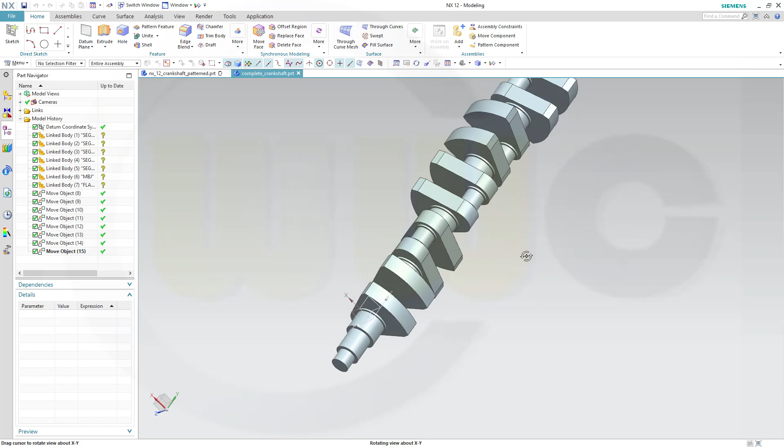I did this crankshaft in almost all programs and in different ways. Today I want to show you the potential of the pattern feature in NX 10, 11 or 12, which allows it to do this very quick. So let's have fun with NX 12.

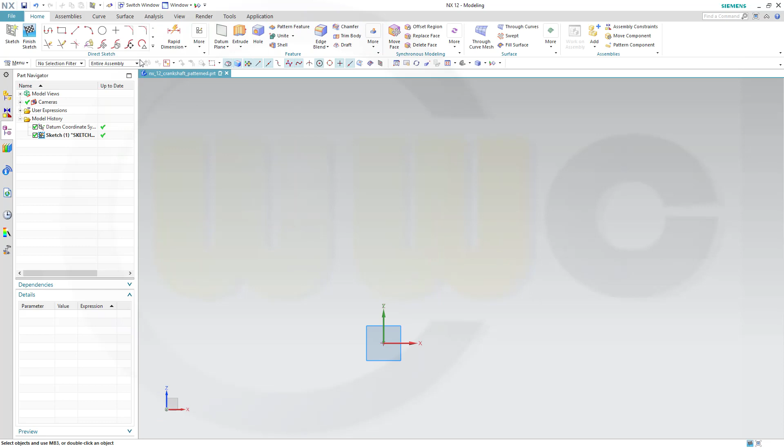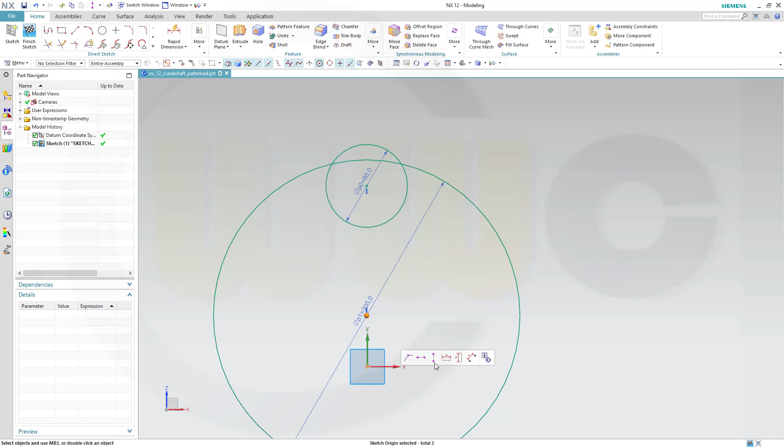Okay, let's start with a sketch on that plane. Confirm. I need two circles. One has a diameter of 80. One has a diameter of 300. They should be aligned. So I think this didn't quite align, so now they're aligned, and this point should be aligned with the sketch origin as well. Okay, the distance from this one to that one should be

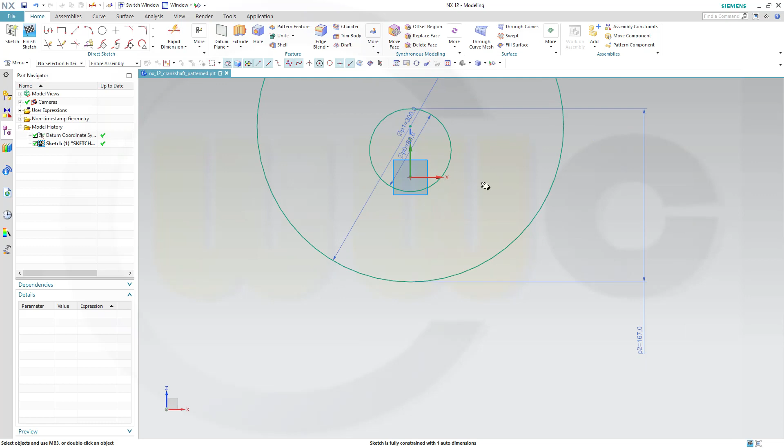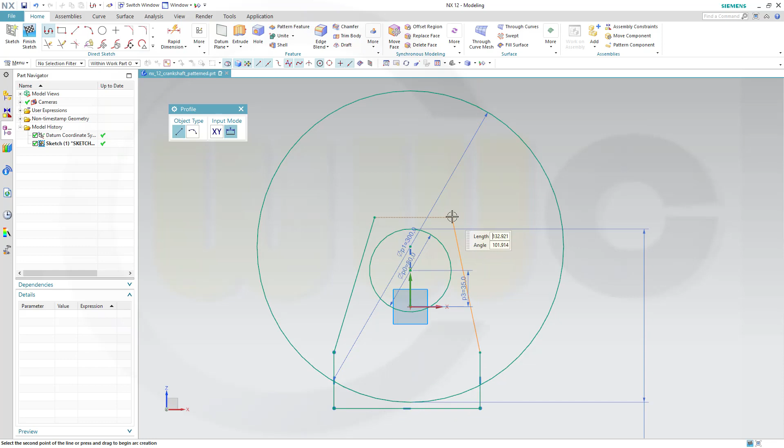167. Okay, and that distance from this point, no, not from this point, but from that point to the sketch origin should be 35. And then I need the profile tool. This should look maybe like this. Okay, this should be tangent, this should be tangent as well.

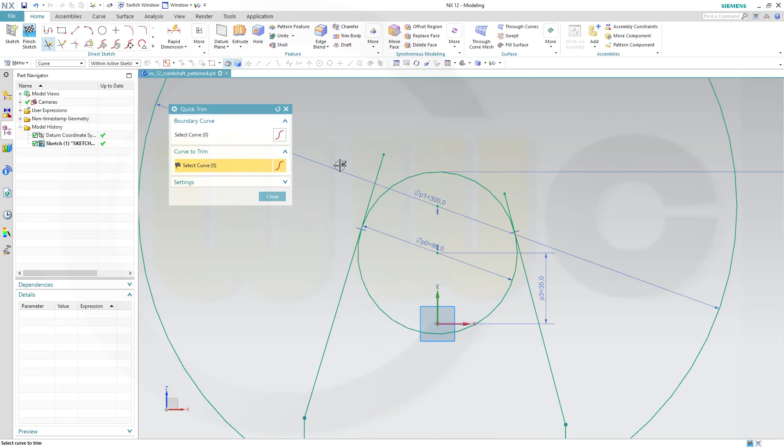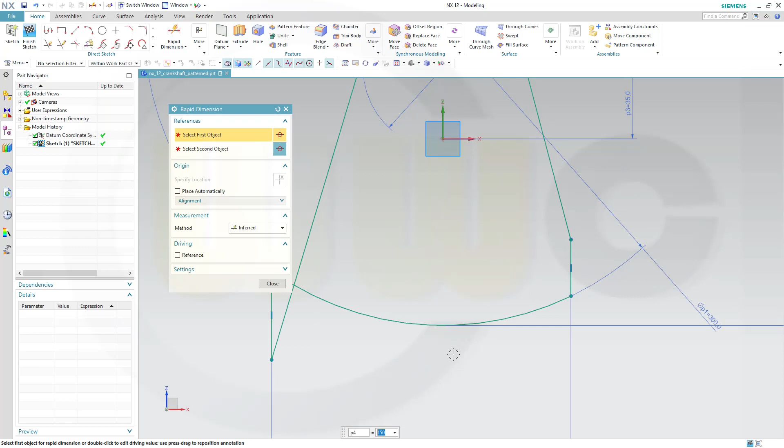Let's trim. This should be trimmed, that, this one, that one, this one, that one. Now the distance should be 150. Really? Let's try to move this up. Yeah. And that angle should be 40. And it should be symmetric. So let's go for symmetry.

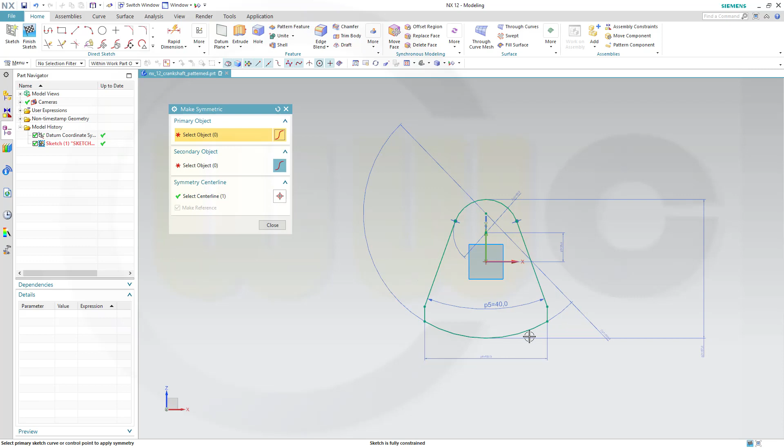Make symmetric this line, that line, that's the symmetry, and take note, that's a very strong symmetry. Okay, finish that sketch, and in this case I want to do my expressions before I do any modeling. So go for expressions, and I got 3 expressions. One is the counterweight width with 20 millimeters. Then the crankpin journals width. Oh, that's wrong. Spelled it wrong. So it should be DTH. Is 40, and the main journals width should be 40 as well. Confirm.

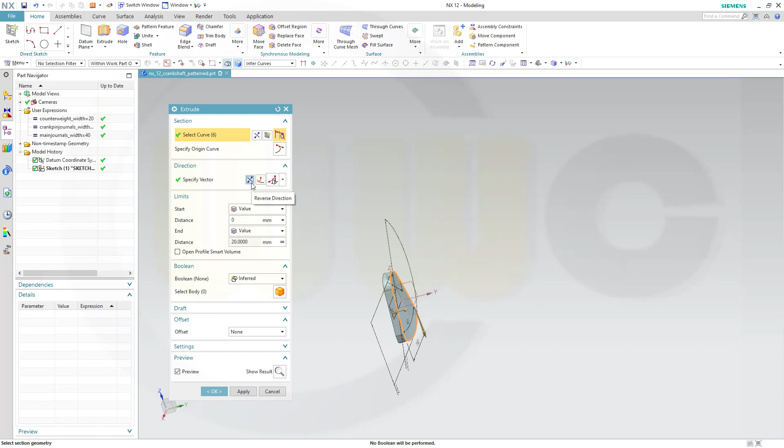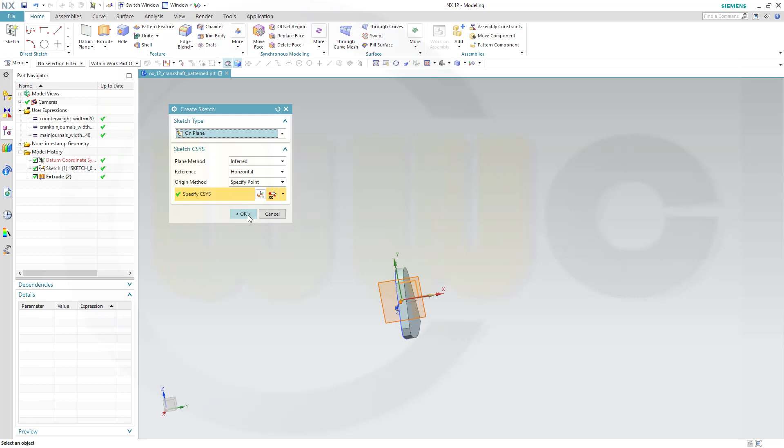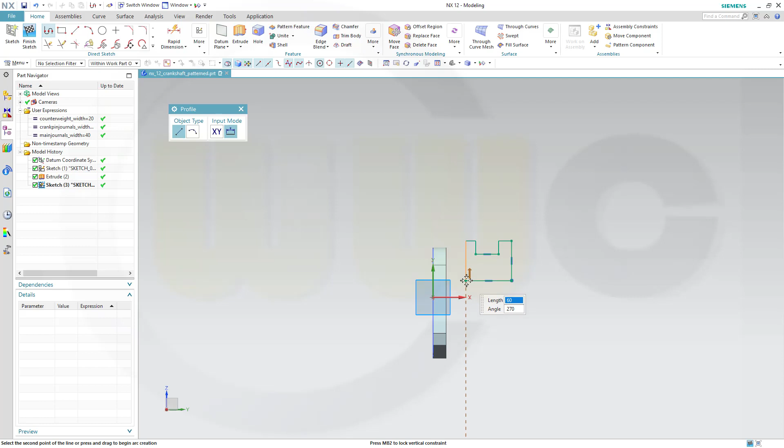Then I need my journals up here, the crankpin journals. So go for a sketch. In this case I will put it there. So this should look something like this. Okay. Are these aligned? No, they're not, so make these two collinear, and that distance would be the crank pin journal width. So go for another formula.

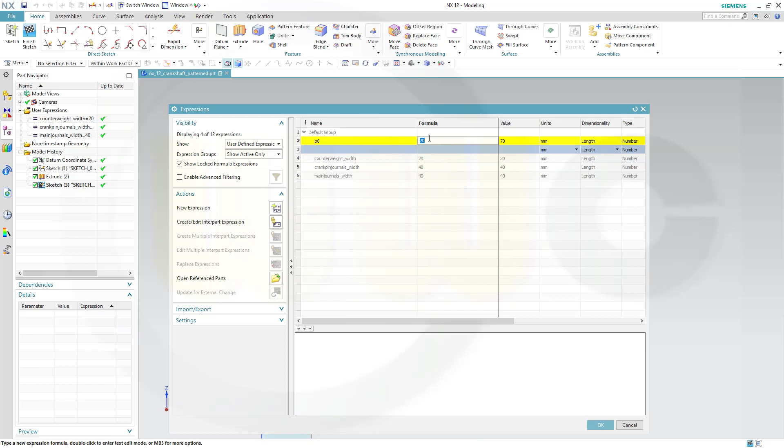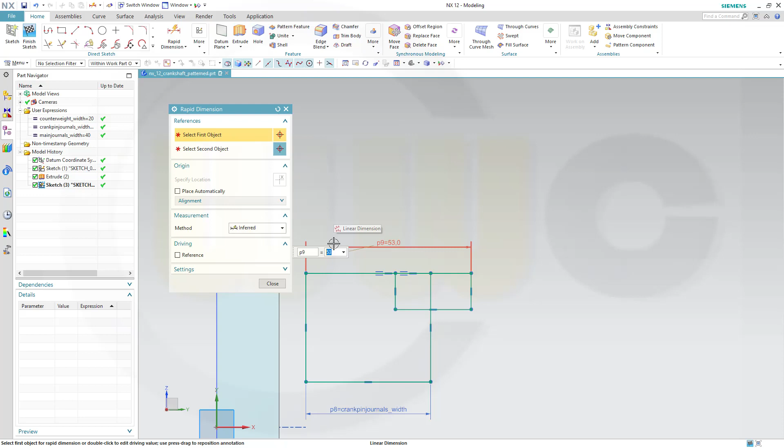Crank pin journal width. Okay, let's... I'm so used to other programs. You have to type, of course, crank pin journal width. Now it's okay. And that distance might be 5. Really 5. And that distance is 5 as well. Close that one.

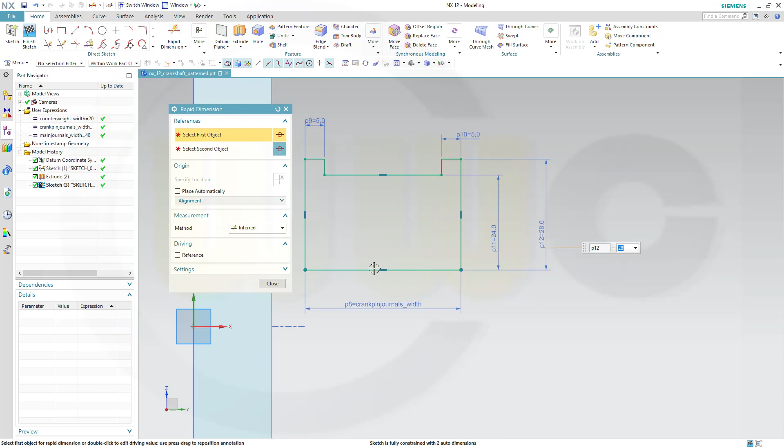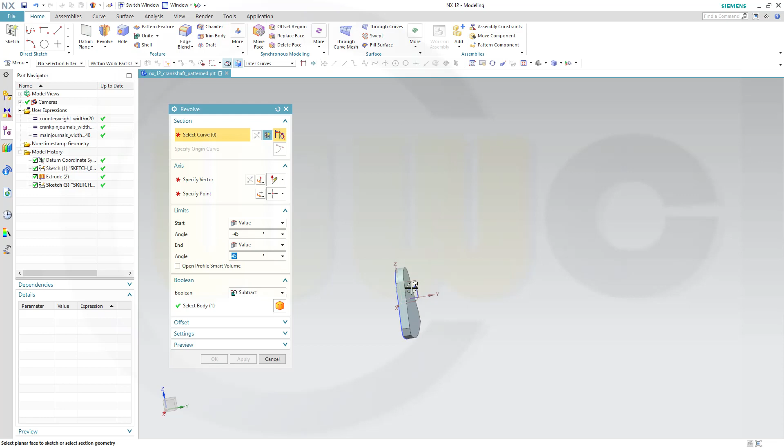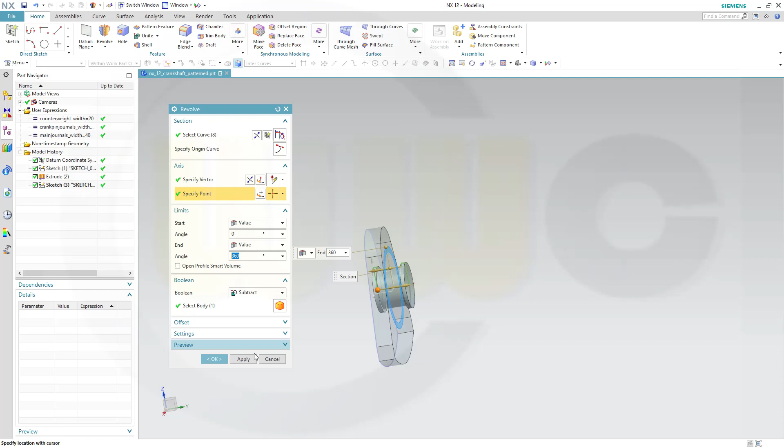Now that distance should be 24, and this one should be 28. Close. Now let's align that line with the axis, collinear, and this one with that axis, collinear. Finish that sketch, make a revolve with that sketch. Around which axis? Around, in this case, the y-axis. Needs a point, so go for 0, 0, 0 and confirm and make it 360 degrees and make it a new body, so go for none.

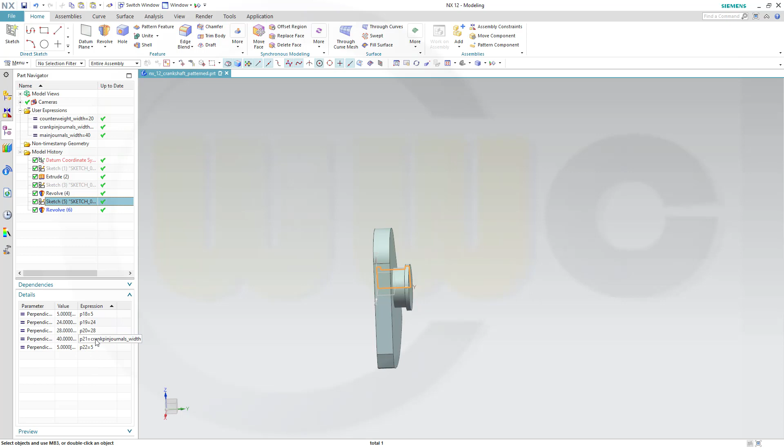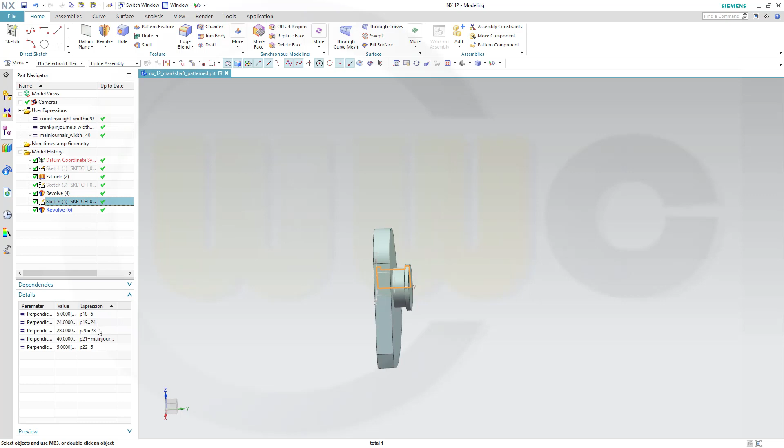Okay, let's hide those sketches. Then the main journal is almost the same, so I could of course copy the revolve and the sketch. Copy and just Control V for paste and just confirm. What I have to do now is just change the values right here, and this one is of course wrong. This has to be not the crank pin journals width, but, go for user defined expressions, the main journals width. Okay, and I have to change those two values. This one should be 42 and this one should be 38.

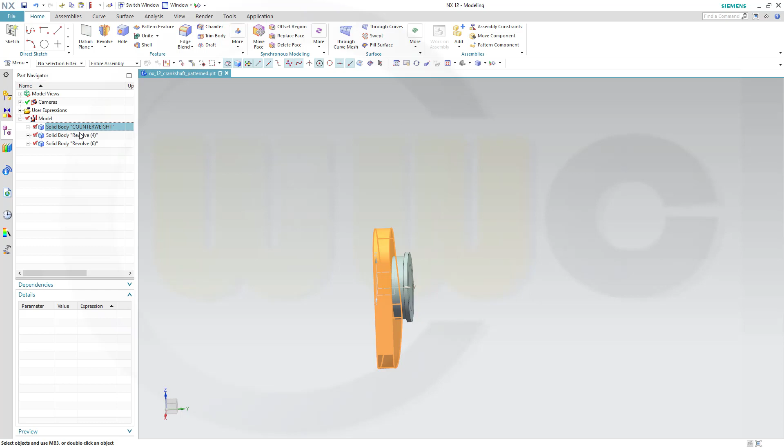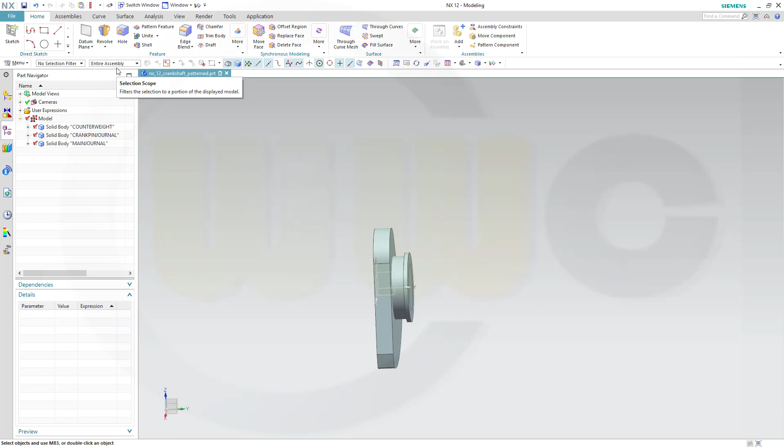Let's switch to the other mode without timestamp order. So this would be the counterweight. This one would be the crank pin journal, and this would be the main journal. Okay. Now I would need the, what it's called, the main bearing journal. So go for another sketch on that plane. And this might look something like this.

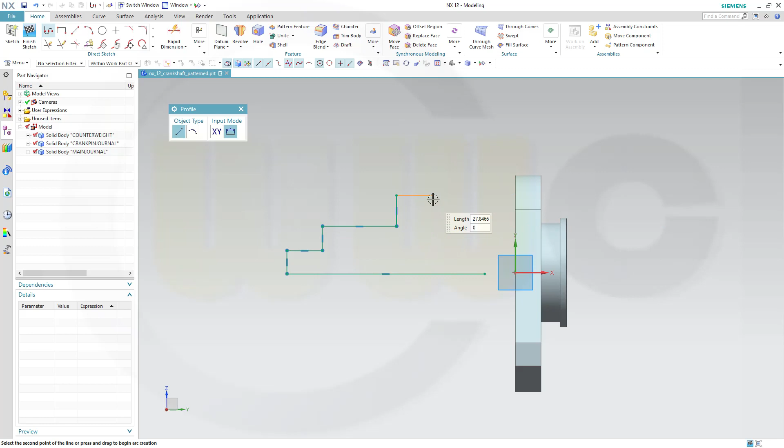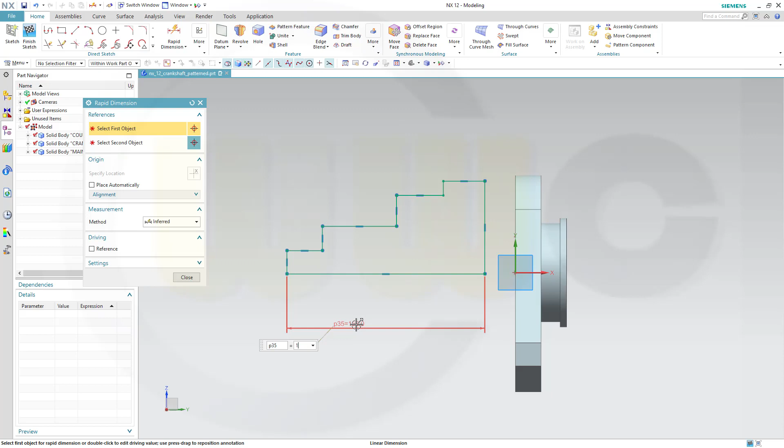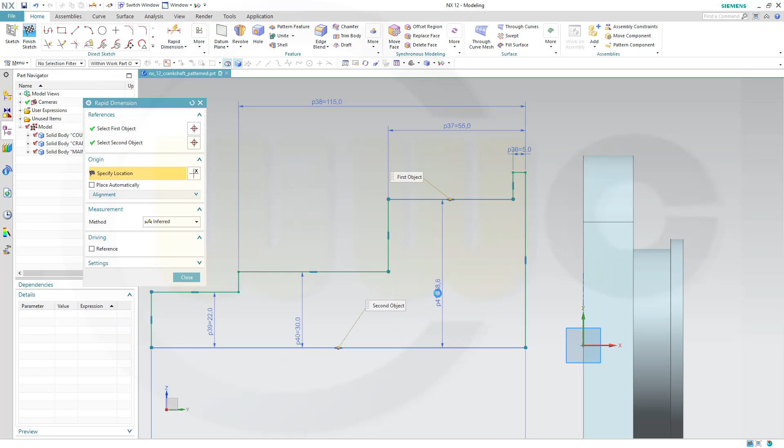Up, up, up, and up. Okay. That distance might be 150. This distance 5. That distance 55. And this one 115. Now this should be 22. That should be 30. This should be 38. Close? No, not, yeah, close.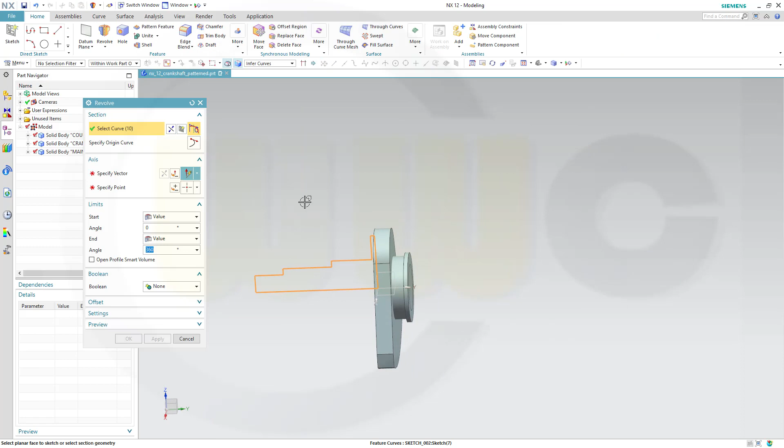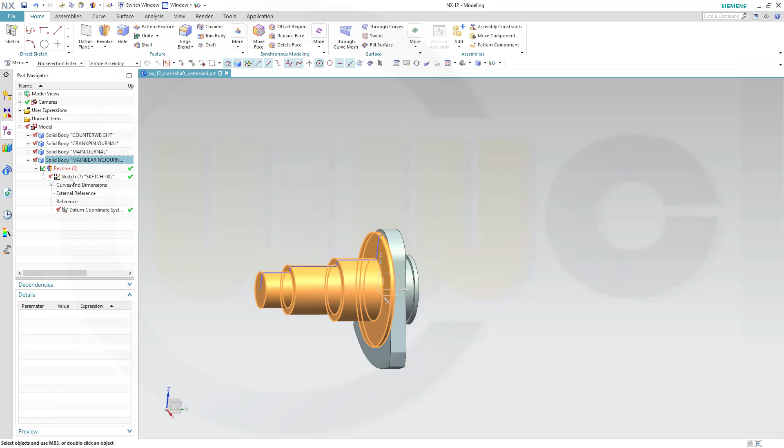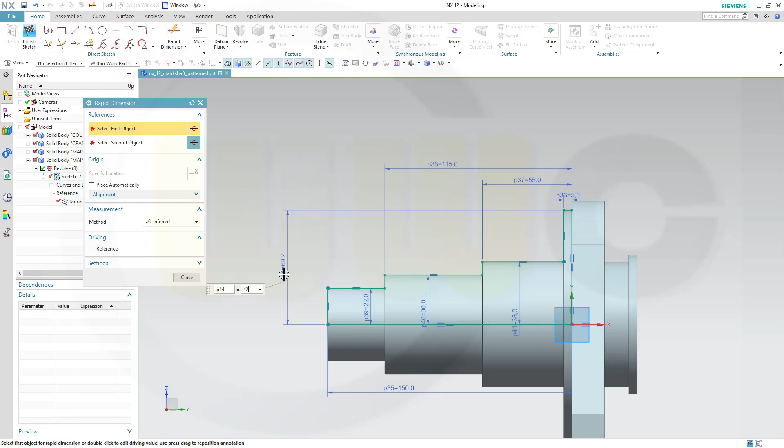And now align these two and those two. Finish that sketch. Make another revolve with that sketch. Go for the y-axis. Point is 0, 0, 0. And confirm. That distance is wrong, so this would be the main bearing journal, and change that one value, and this would be, I think I forgot this one. Yes, I did. So that distance should be 42, and close and finish that sketch. Hide the sketches.

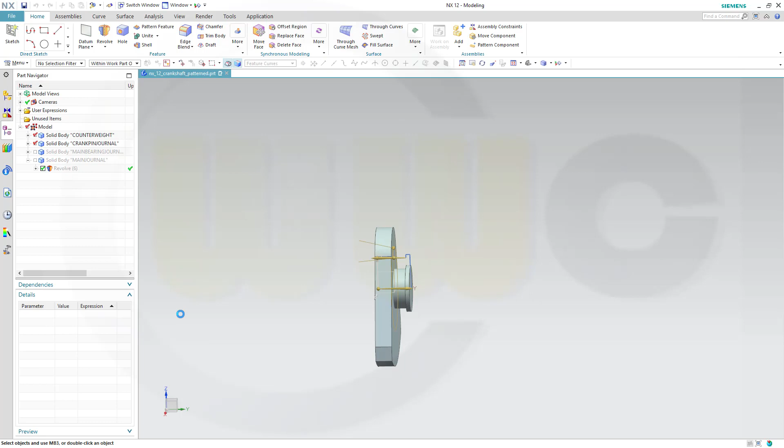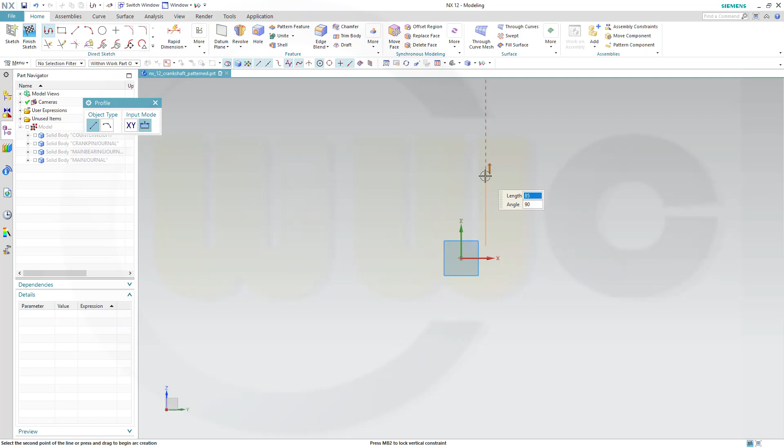Okay, then I need the flange, so let's check if I did this with non-boolean. Yes, that's okay. Of course I did, otherwise there would be not a new body. So I could hide those for the moment. One of the advantages of bodies. Make a sketch right here. Okay, and this one looks something like this.

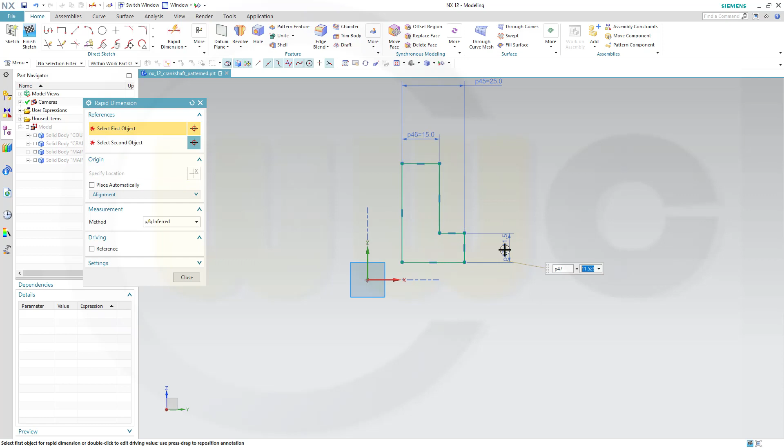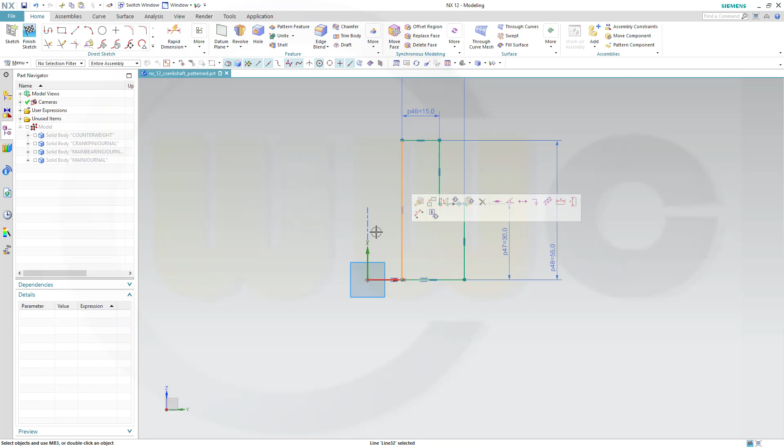Okay, this might be 25. This might be 15. And that distance could be 30. And that one could be 55. Now align these two. That should be collinear, and that should be collinear as well. Finish that sketch, make another revolve with that sketch, go again for the y-axis, the point is again 0, 0, 0, and confirm. And this should be the flange.

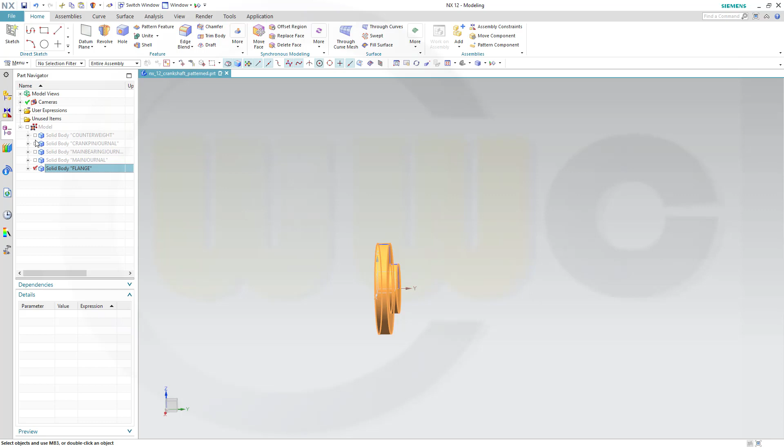So next I want to make copies of these bodies. So go for extract geometry. I want to have copies associative, so go for the counterweight, apply, then for the crankpin journal, apply, then for the flange, apply, main bearing journal, apply, and for the main journal, apply.

Cancel this out, so on top there should always be the copy, so hide those original solids and change the name, add a C, for copy.

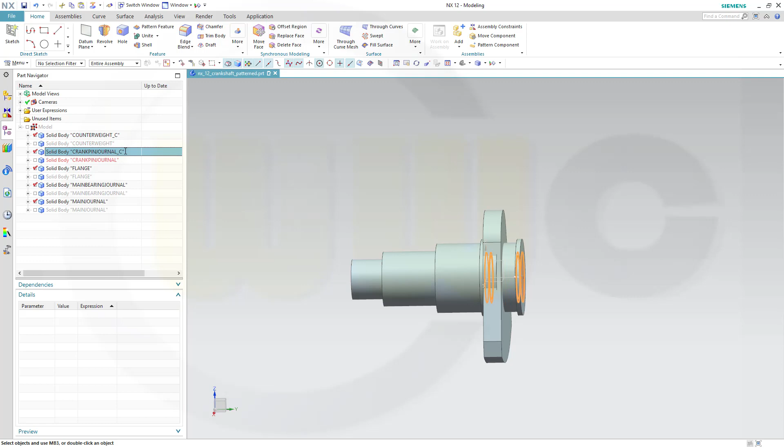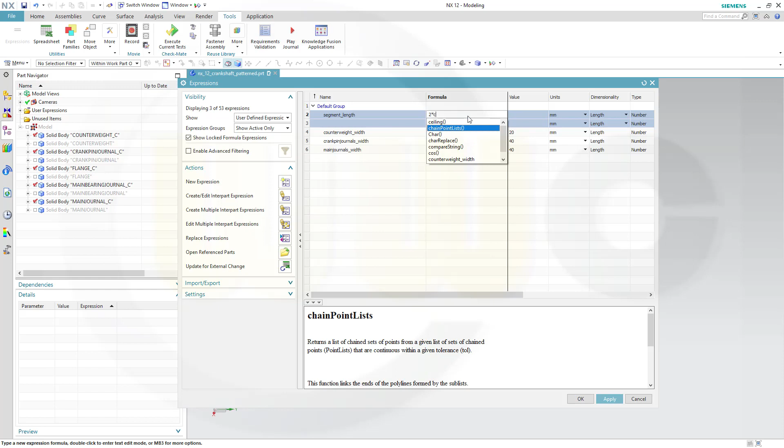C, okay. Now I want to move the flange to the correct position, therefore I will need another expression. So go to Tools, Expressions, call this segment length, and this should be, of course, not 5 times, it's just 2 times the counterweight width plus the main journal's width plus the crank pin journal's width. And this should be in this case 120. Yes, it is, and confirm.

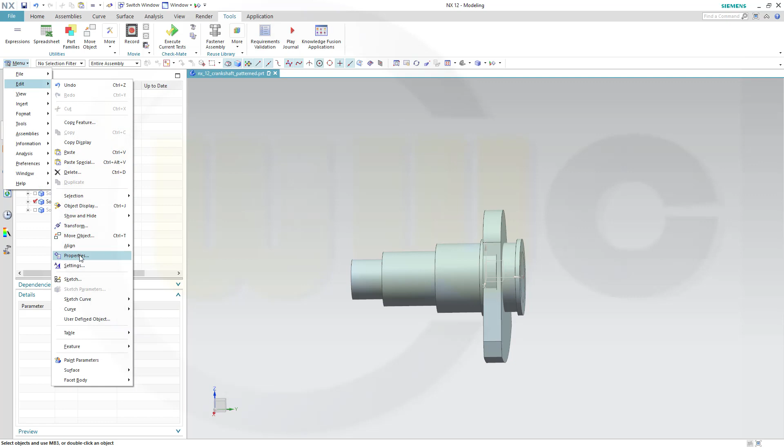Now move the flange with menu, edit, move object. I want to move that flange copy. The vector should be the y-axis, and that should be a formula 5 times the segment length. And OK, and OK. Let's take a look. Yes, this looks good.

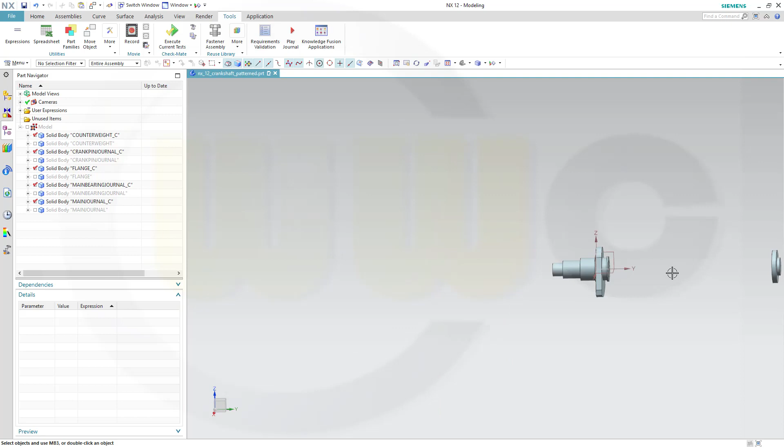Now move those journals to the correct position. The crank pin journal should be moved again a distance. The vector would be the same as before, and that distance should be the counterweight width. Okay. Confirm. And then it should be moved once more.

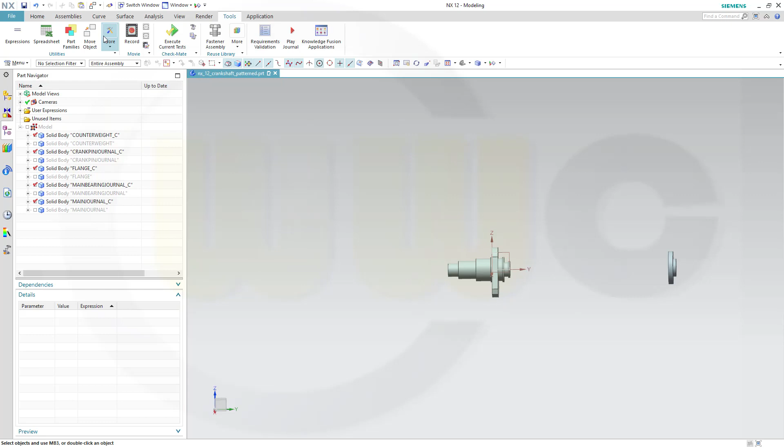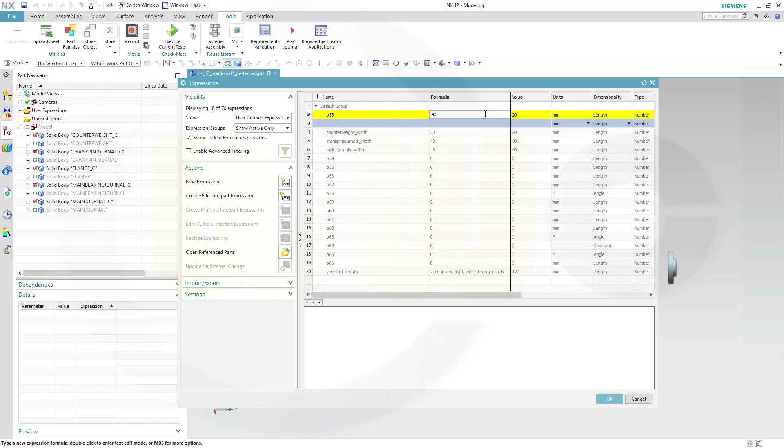It should be moved in the Z direction, and that value would not be a formula but just a value. So that should be 40, but therefore we will have to delete this one and add 40 right there. Okay, the object should be again the crank pin journal.

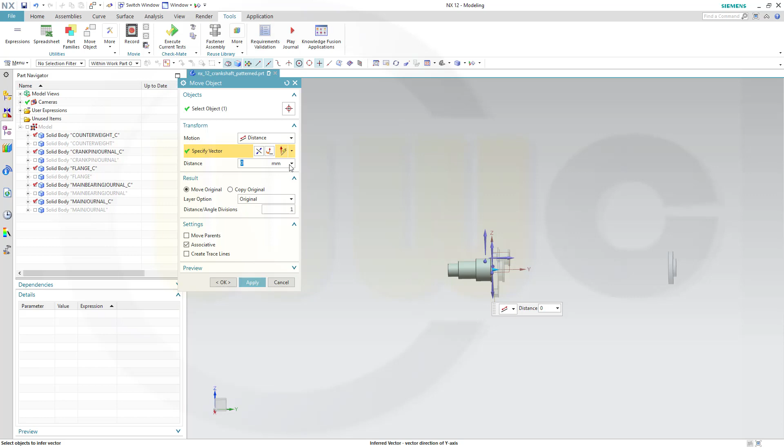Apply. Next would be the main bearing journal, and this should be moved along the Y direction, and that should be a formula. And this would be 2 times the counterweight width plus once the crank pin journal's width, and enter, and OK.

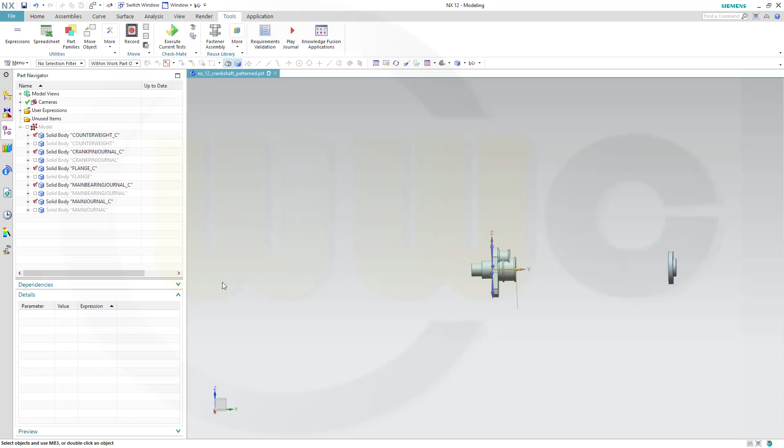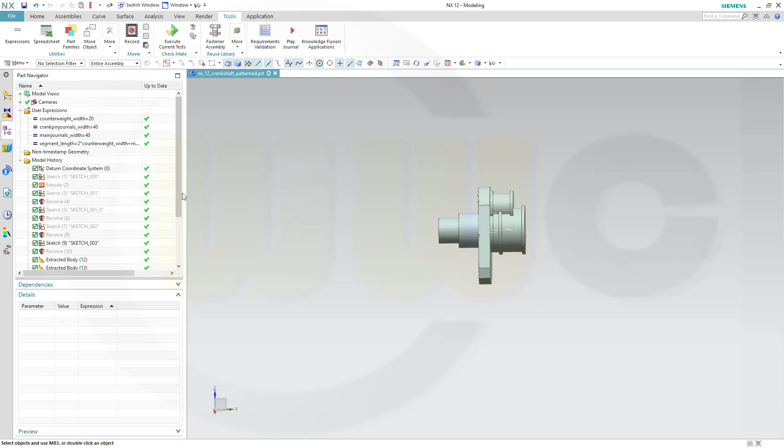So let me take a look. That seems, oh yeah, I took the wrong one, sorry. This move should be not that, but this body. Okay.

Now I want to pattern this one. So go to home, go to more, pattern geometry. I want to pattern this body along the y-axis, of course. 2 instances, and the distance between those two should be, of course, a formula, and that would be the crank pin journal's width.

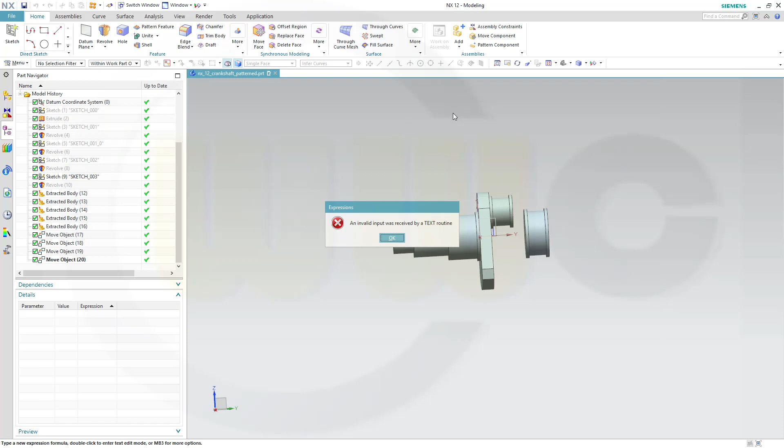No, yeah, I know. Crank pin journal's width, and enter, and OK. But I have to add one counterweight width as well, so it's plus the counterweight width. Confirm and OK. Now it's on the correct position, and that's OK.

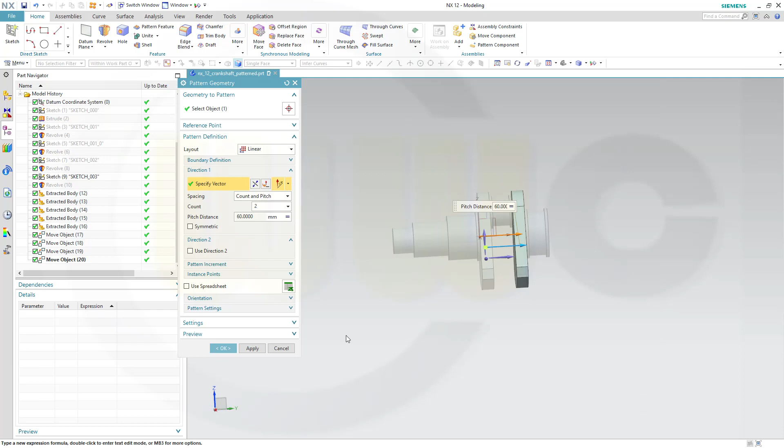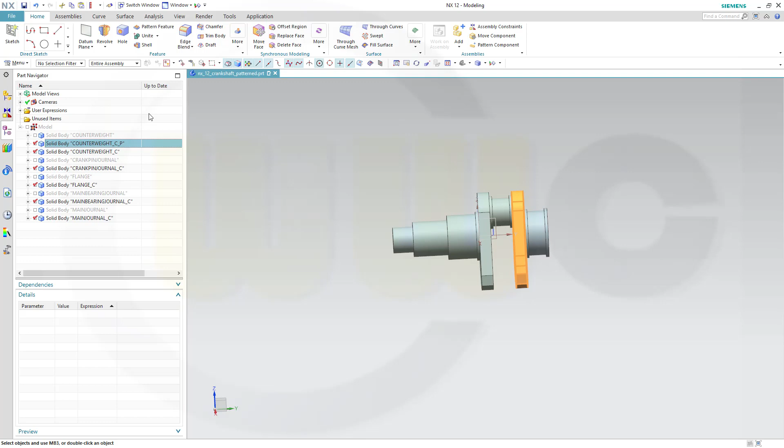Now let's unite those. And you should note there is another body right here. That's another body. So that's the copy 2, that's the pattern copy. So I will add there, that's the patterned instance.

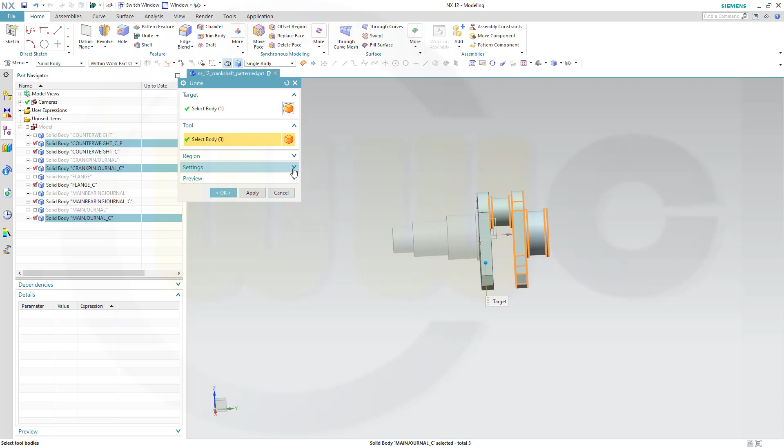Now I want to unite those. So this one to that one, this one and that one. Okay, and you should of course keep the target and keep the tool. Okay, so there should be a new body. That might be that one on the top, yes, and that's the segment. Now you could go for a copy of the segment, but that's not necessary.

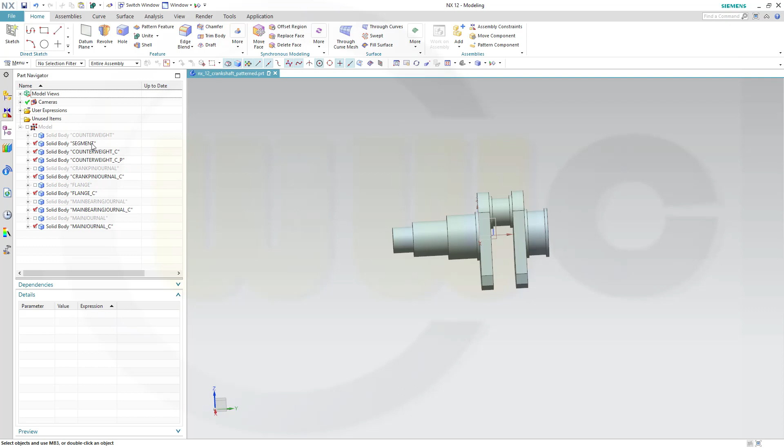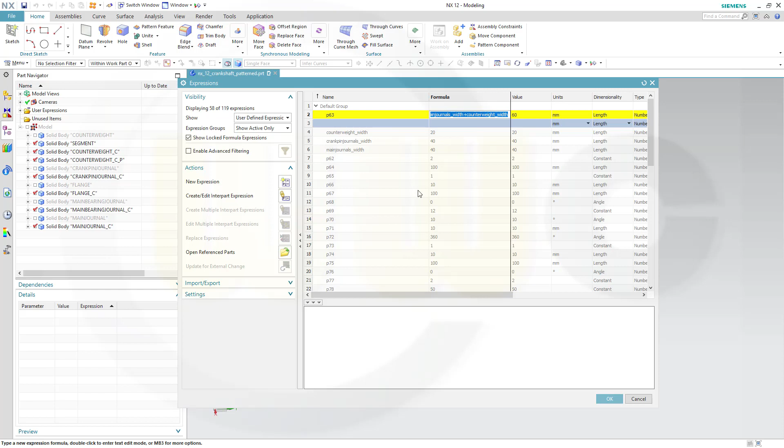Now I want to pattern that segment. So go for more, go for pattern geometry, and I want to pattern that segment. The vector would be again the y-axis, and I need 5 instances, and the distance between these should be the segment length, of course. So that should be the segment length. Okay. That's okay. Count and pitch, I got 5.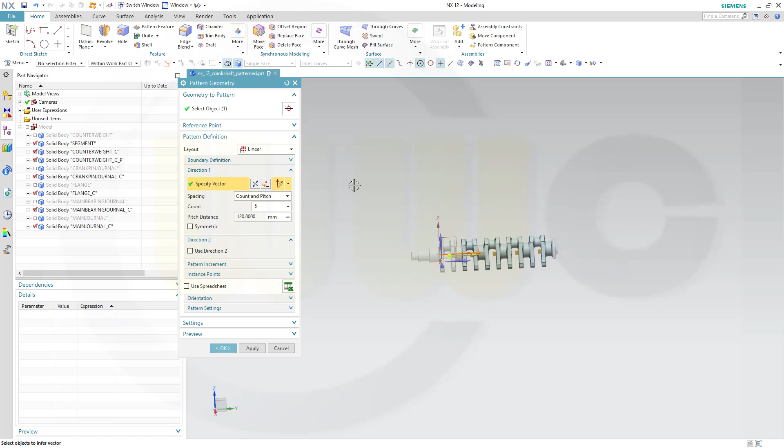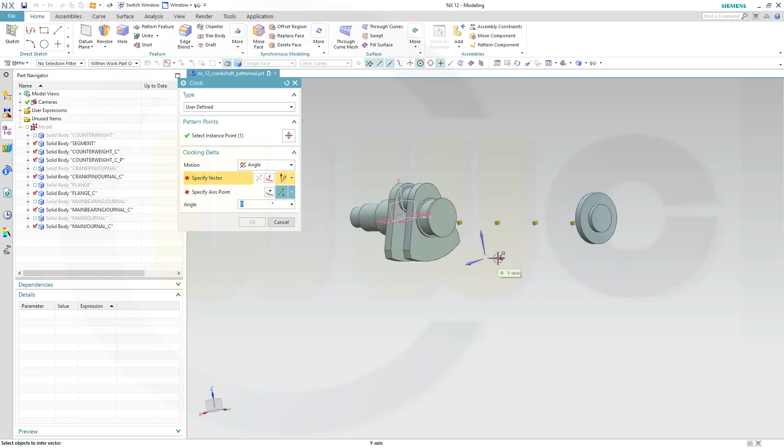Now the interesting thing with the pattern in NX is you can arrange those in different positions. That's quite interesting. So I could go there and go for clock, and if you change within pattern definition to user defined, you could even rotate them, and that's sort of crazy, but that's very nice. So I could go for an angle, and I could rotate this around the y-axis. Of course I need a point, that would be 0, 0, 0.

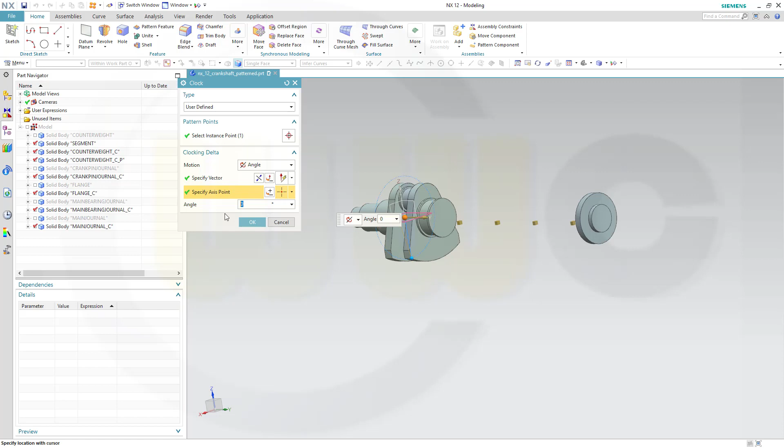And now I could use an angle, and that angle should be, let me check, minus 144 degrees. And OK. And now I could do this for that instance. Just go there, clock. Again, go for user defined. Go for an angle. Again, that axis. Again, the 0, 0, 0 point. And that angle would be minus 216. Okay.

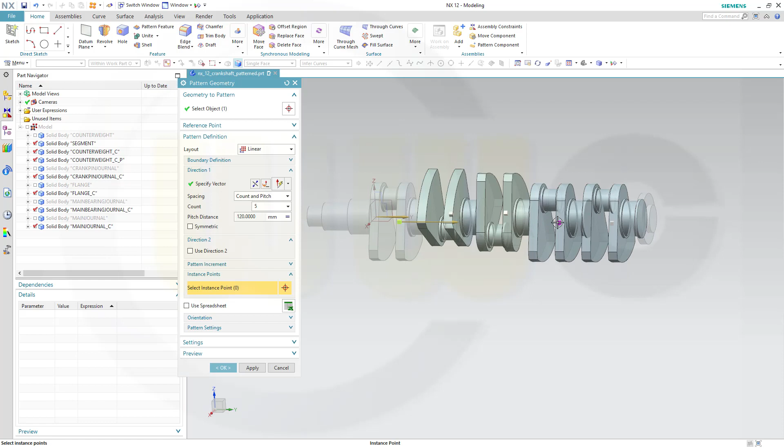Then the next one, again clock, again go for user defined, and go for an angle, vector, point. If I would have defined an axis, it would go even faster. And that angle should be minus 288. Okay.

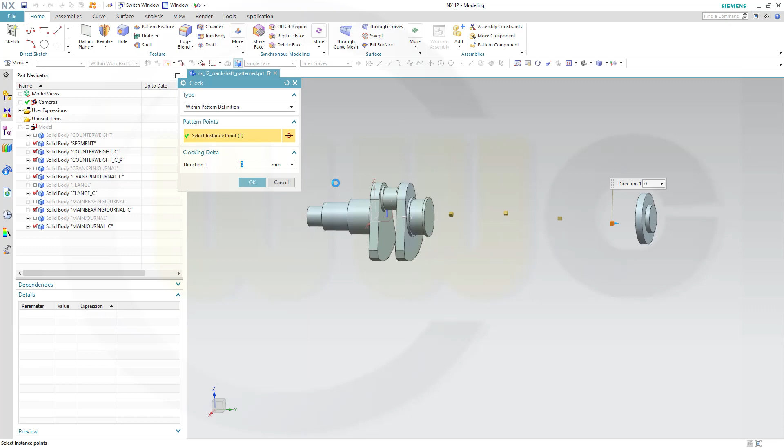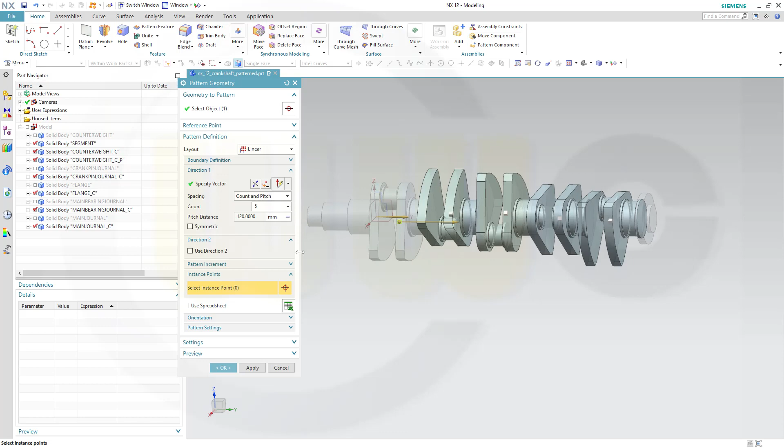And the last one, again go for clock, go for user defined, go for angle, that's the vector, again the point 0, 0, 0, and that angle should be minus 72 degrees, and confirm, and I'm done. So if I now change one of these values, it should work. Let's try. Make this one 30. Very nice. Make this one, for example, 50. That one 50. Yeah, works.

So that pattern feature in NX is very, very good. I'm not aware of any other pattern feature which could do things like this.